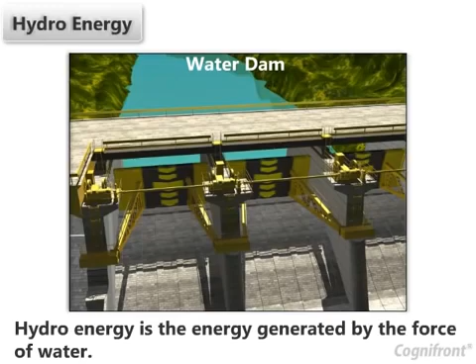Hydro energy. Hydro energy is the energy generated by the force of water. This is a powerful way of generating electricity. The hydro energy is converted into electric energy by hydroelectric power plant, and this energy is called hydroelectricity.

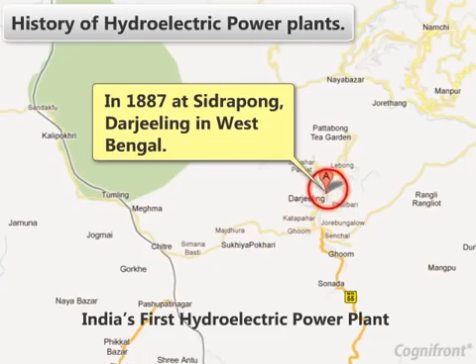History of hydroelectric power plants. World's first hydroelectric power plant was built across the Fox River in Appleton, Wisconsin in the US in the year 1882. India's first hydroelectric power plant was commissioned in 1887 at Sidrapong, Darjeeling in West Bengal.

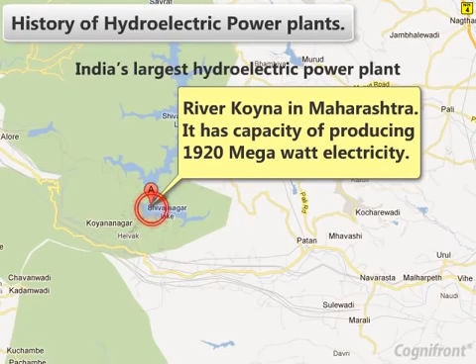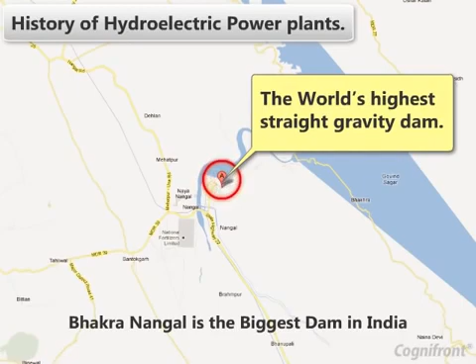India's largest hydroelectric power plant is located across the river Koyna in Maharashtra. It has a capacity of producing 1920 megawatt electricity. Bhakra Nangal is the biggest dam in India as well as the world's highest straight gravity dam.

The working principle of hydroelectric power plant: in this power plant, production of electricity depends upon the height of the water from ground level, volume of water flowing per unit time, and efficiency of the turbines.

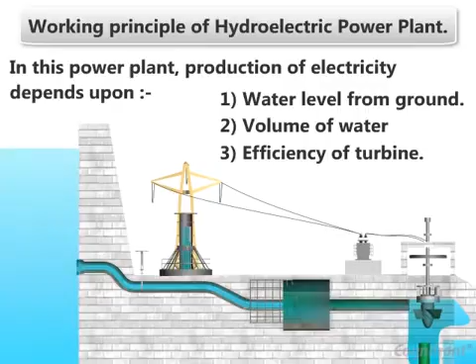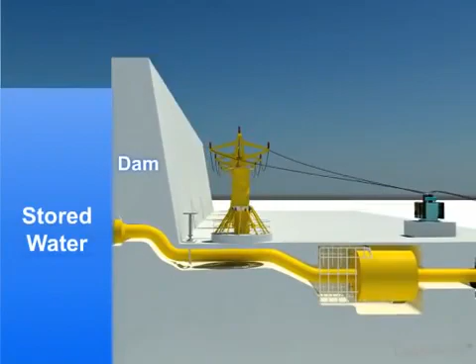Hydroelectric power plant requires a water reservoir, so these plants are constructed near big dams. Water stored in dams has potential energy.

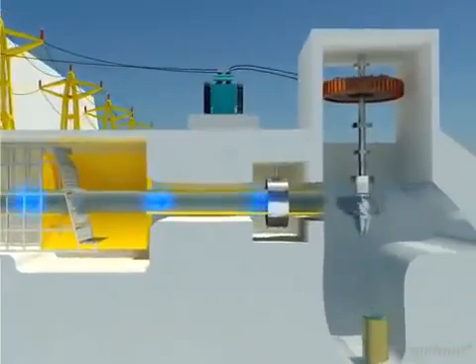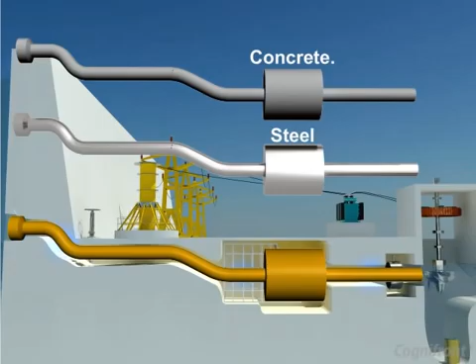The water under pressure is carried by penstock and supplied to the turbine through the inlet valve. Penstock is a pipe made up of steel or concrete.

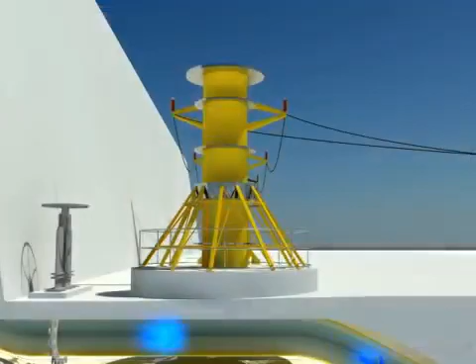A surge tank reduces the excessive water force on the penstock. Here, trash rack prevents debris from getting entry into the powerhouse.

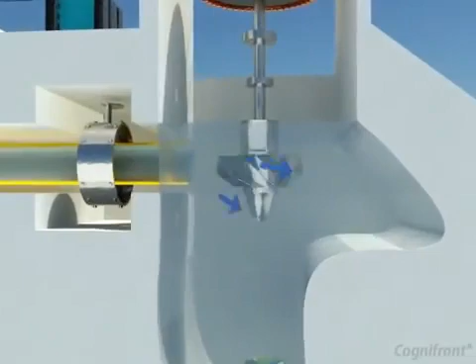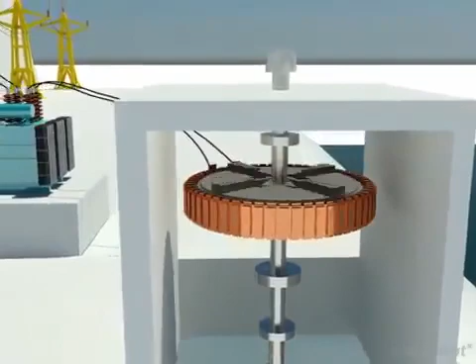Due to the force of water, the turbine starts rotating, due to which mechanical energy is produced. The shaft from the turbine is connected to the generator. Therefore, the generator produces electricity. The voltage of this electricity is raised by using a transformer and is transferred by the distribution lines.

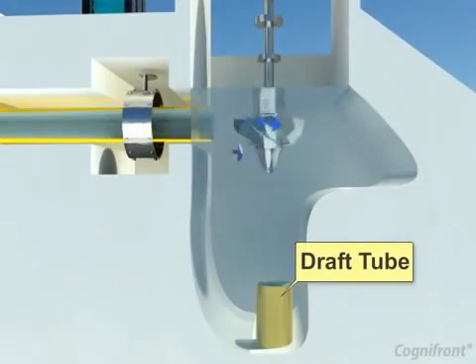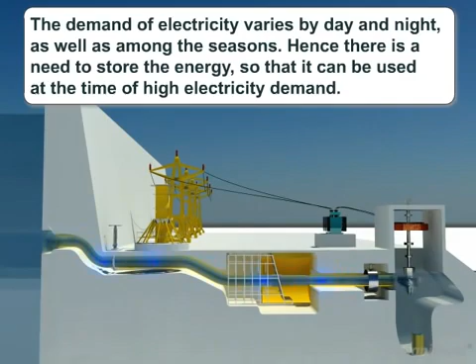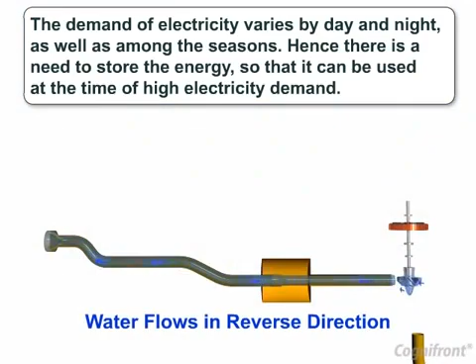After running the turbine, the water is passed to the downstream water level by draft tube. The demand of electricity varies by day and night as well as among the seasons. Hence, there is a need to store the energy so that it can be used at the time of high electricity demand. This can be done by using the pump storage process.

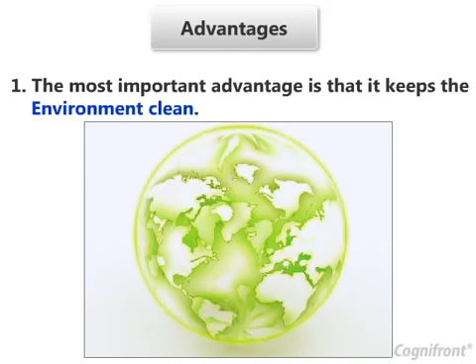Advantages and disadvantages of hydroelectric power plant. The most important advantage is that it keeps the environment clean.

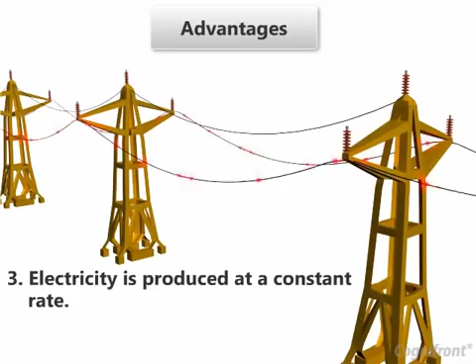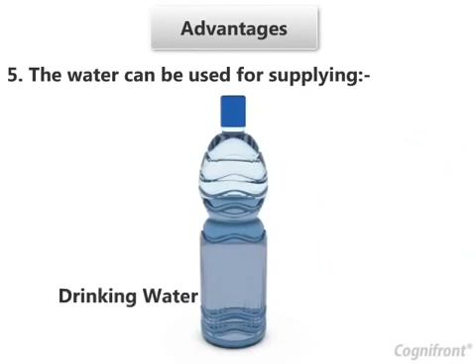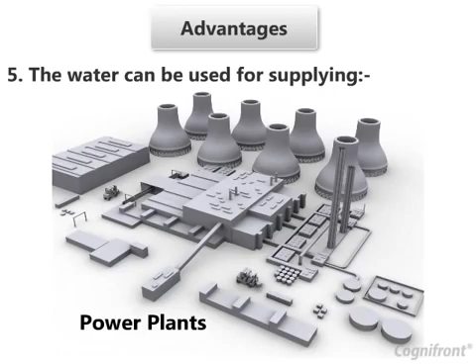Hydro energy can be stored in high-level reservoirs and used whenever necessary. Electricity is produced at a constant rate. The life of dams and power plants lasts for many decades. The water can be used for supplying drinking water, irrigation, water sports, industries, power plants, etc.

Another advantage is that when electricity is not needed, the sluice gate is closed to stop the generation of electricity. It also allows storage of water to be used whenever necessary.

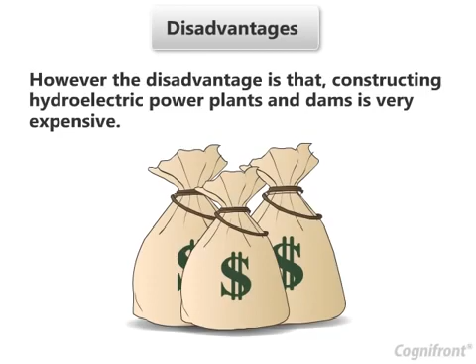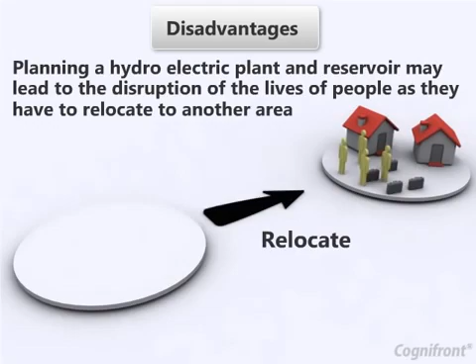However, the disadvantage is that constructing hydroelectric power plants and dams is very expensive. It requires a large area. Another disadvantage is that planning a hydroelectric plant and reservoir may lead to the disruption of the lives of people living in that area, as they have to relocate to another area.

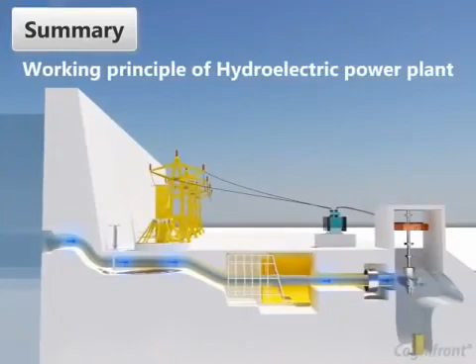In this session, we learnt about hydro energy, the history of hydroelectric power plants, the working principle of hydroelectric power plants. We also studied its advantages and disadvantages.